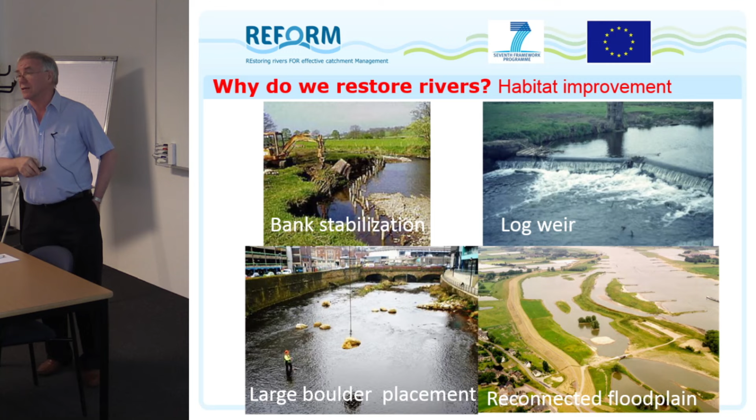We might want to increase habitat diversity through things like small log weirs, where you're creating a pool upstream and some flow conditions or a scouring pool below. Situations like this one in an urban area, this is in Sheffield in the UK, placing rocks because the whole of the channel has been simplified and we want to try and increase the habitat diversity.

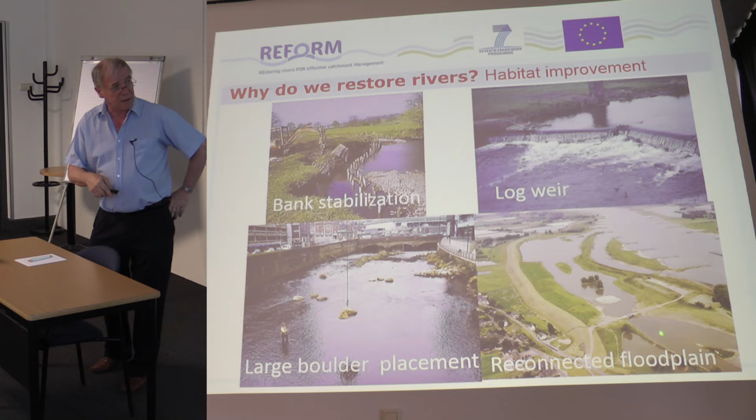And then you go to these very complicated situations such as we've got here, reconnecting the floodplain. This is the river here in the Netherlands, and you've got reconnection of the side water channels and backwater channels while still maintaining the navigation processes. We do a lot of this type of stuff in restoration.

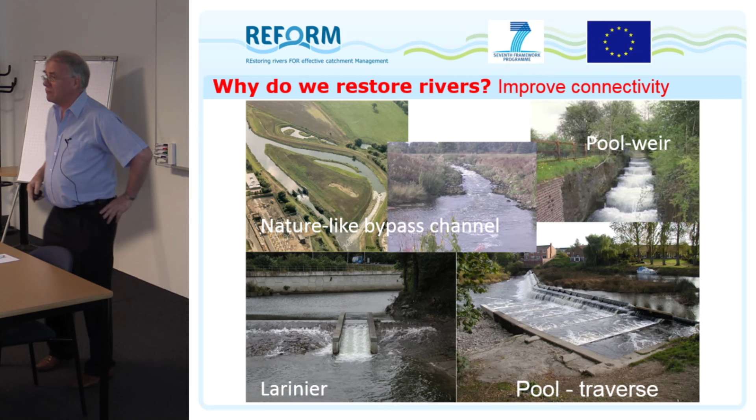In fact, a lot of emphasis has always been on reconnecting the river so that fish can move up and downstream. And so you see huge different types of fish passes, from very simple Larinier systems or pool traverse systems like this, through to very complex ones, nature-like bypass systems, which allow the fish to go up through a stream to bypass an obstacle. These are very good because fish even breed in them, as we found from what we've done in the past.

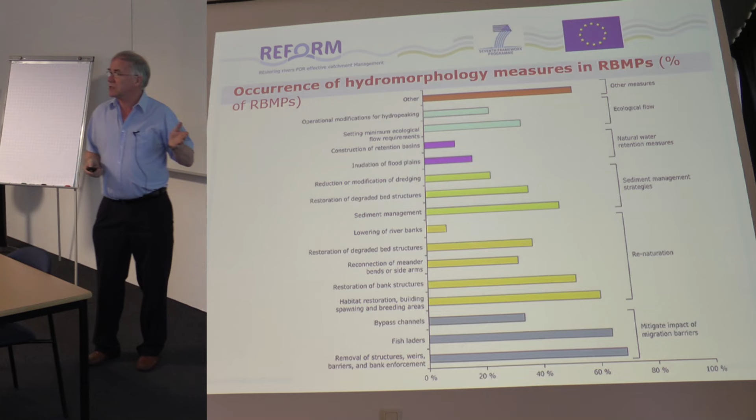So there's an awful lot of activities take place, but which ones do you choose? When you go to a river system that's been degraded in some way, which measure do you choose? Which activity do you choose? Which one's going to be the most successful? And if you have a look at what's taken place globally and also within the European Commission.

We did a review of the various European projects that were taking place and a review of all the LIFE projects that we could find that were dealing with improvements in aquatic biodiversity. And if you have a look at those, in conjunction with about 37,000 North American projects that were looked at by Margaret Palmer, you can actually see that a huge number of them actually didn't have any endpoint. They didn't have any definition of what they were trying to achieve,

which is pretty bizarre considering the investment that goes into restoration projects. You think of the cost of them. So they didn't actually define what they wanted to get out of it. And that's a huge proportion. I'll show you a bit more on this in a second.

Many of the outcomes that we actually looked at in relation to the European projects were related to the Water Framework Directive. And basically the outcome they were defining is to achieve good ecological status, to achieve good ecological potential. But what is that? These are very big areas of change that you're trying to achieve. And quite honestly, if you put some activities in, you may be improving the quality slightly, but you're probably not improving the ecological status. You may be at moderate, but moderate is such a big boundary that you could easily move within it and actually not see any potential change.

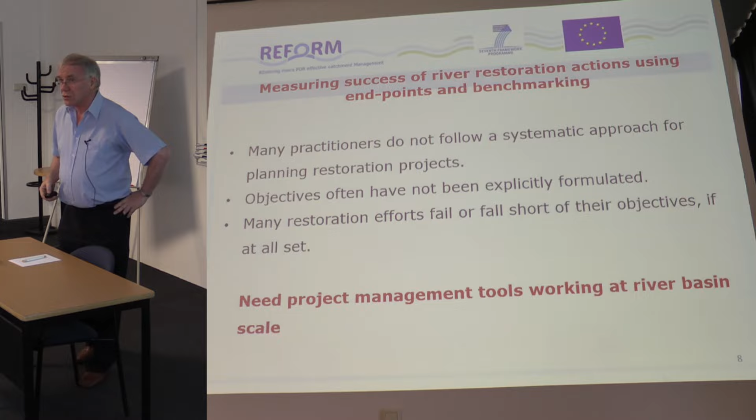The reasons for it are multifold, because really we don't adopt any systematic approach to planning of restoration projects. We tend to go and do them. In many cases, particularly in small scale projects, there tends to be money that's available at the end of a year or becomes available for a small period of time. So you literally go in and do it. You've probably got something you'd like to do and you just literally go and do it as quickly as possible.

So we don't put in the opportunities to measure these activities. We don't often set objectives, mainly because money comes in a fragmented way. So we don't set really solid objectives of what those activities are going to be, or we do them on a small scale and we don't link it up at the catchment level. And that's a problem. We tend to look at individual little projects and we don't have it on a broad-based catchment scale, which is where we need to operate in river restoration.

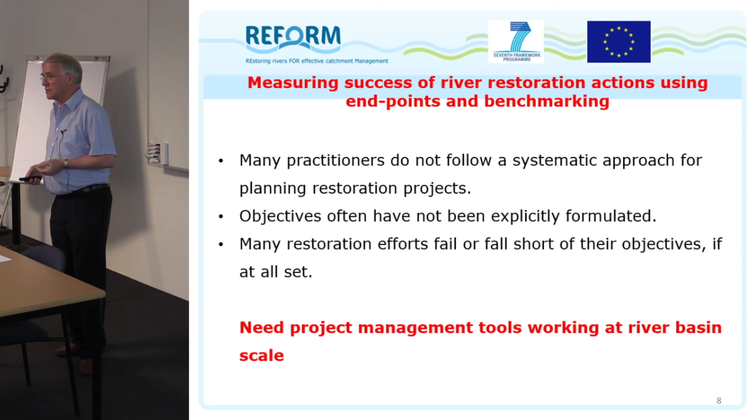Many of them fall short of the objectives, as I've shown you, but the reality is actually the objectives are not set. So we have great difficulty measuring what that success will be. And if we're going to improve our outcomes of restoration measures and all the activities that take place, all the millions of euros that are spent, we're going to have to find a way of actually measuring this. So we certainly need management tools based on the river basin scale to actually look at the success of projects. And what I want to do is show you some of this as we're going on.

The identification takes place, but the formulation doesn't take place. Project implementation always takes place, but rarely do we monitor what's gone on. In this process, at each stage, in the early phases of a project, you should be identifying what the project will be in relation to the needs of your country, your international obligations, such as the Water Framework Directive, or in terms of what that river basin needs to get better. So you're defining objectives at a national level, a local level, and regional or international level. Define what they are, identify what they are and target those things, because that's what you're setting your restoration for. That's what you want to try and achieve. So you want a broad-based approach that can achieve something.

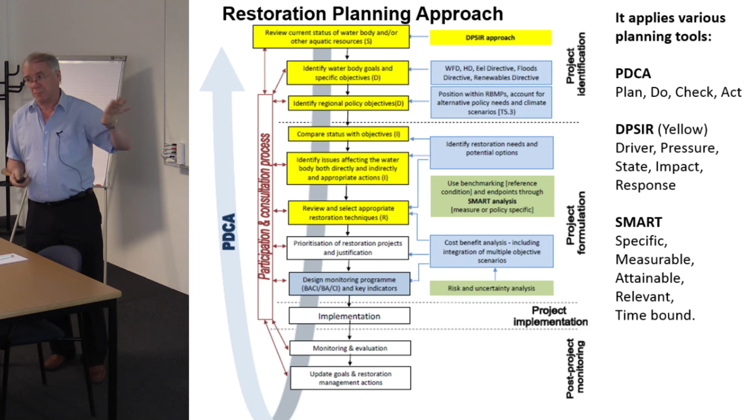The thing about this complex activity is that we've got to capture a few other things within it. And one of the big ones is we've got to capture the risks of activities failing or the uncertainties about activities failing. We actually don't know enough about our project activities and whether the measures will actually achieve anything. What's the risk of you doing something and it failing or actually causing a bigger problem?

A good example is if you put in some current deflectors and they could start to erode the riverbank where you don't want it, and a farmer could lose his field. And I've actually seen it happen where fields have been eroded away. The farmer's not very happy. The material deposits on another farmer who is happy. Or I've seen the footings of a bridge being eroded away and the bridge collapse. So you've got to make sure that there's no risks, or you reduce the risks of your activity before any failure takes place.

You've also got to build this into considering the effectiveness of different river types, river styles. And Angela Gurnell will talk a little later about this, where you've got different rivers that behave differently, they act differently, they function differently, and therefore you have to choose your measures in relation to the different river types that we've actually got. Don't think one type of measure fits all, because it doesn't. It has to be relating to different river styles.

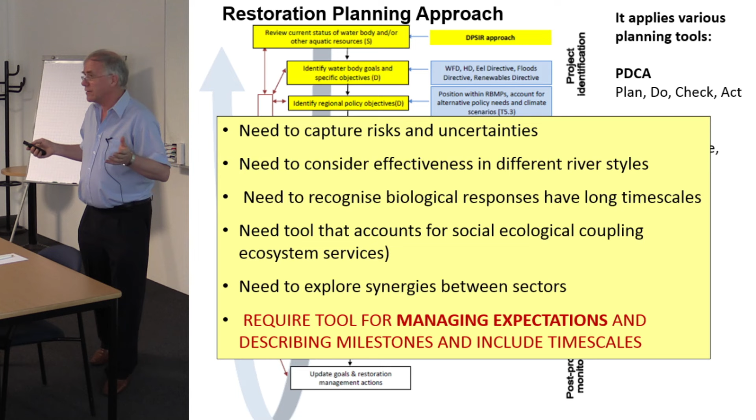So the way forward, how can we go forward? We've actually got to start to put in some project planning tools. We've got to have a complete understanding of our river, its ecosystem, its functioning, and we don't necessarily have that. We need some type of benchmarking, so we need to know what the status, the reference conditions are that we want to try and target, and therefore define key objectives against those targets.

The benchmarking and the setting of objectives should be feasible, practical, measurable, so this is the SMART outcomes. And the questions that we need to ask are, what do we do, why are we doing it, and do we really need it? We should be asking these before we go ahead and project plan. And I've already mentioned that you need the social and economic framework. So you've got to put in the cost-benefit analysis and the social benefits. Do people really need it, or do they need what's going on?

Benchmarking, just to go into it briefly, can be done in a number of ways. We can actually look at reference sites, we can look at natural conditions, and then compare those conditions against your site and see how we can move from your degraded site towards what a reference condition is. The problem here is, how many of these have we got left, certainly in Europe? Not many. We can do predictive modelling, predict what the outcome should be and what we should be targeting, and there are plenty of tools available for that.

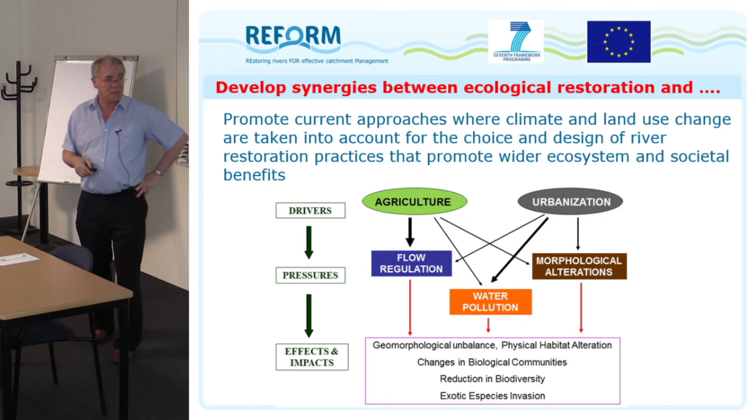It's absolutely fundamental that we don't deal with your restoration measure in isolation. You must look at all the other activities that are taking place. And here's some of the synergies that you've actually got, and they already exist in many parts of the world. And here you've got things like flood protection, making room for the rivers, which is the sort of thing that happens in the Netherlands, where they actually open up the river channel, so they've actually got room both for restoration and for flood protection.

Navigation. Navigation activities occur on many of the large rivers, but can we use them in relation to improving restoration success? Agricultural practices: quite a lot of the problems come from agriculture, so if we can address the agricultural practice, we can probably improve the restoration measure. Hydropower is one of the big issues that takes place, as is urban development. What can you do in urban areas? It's very different to what you can actually do in other places.

By working with these other activities and these other stakeholders, we can actually expand the opportunities for restoration. And actually quite a lot of these can potentially fund the restoration measure, which is useful. So what it allows is wider societal acceptance of restoration activities.

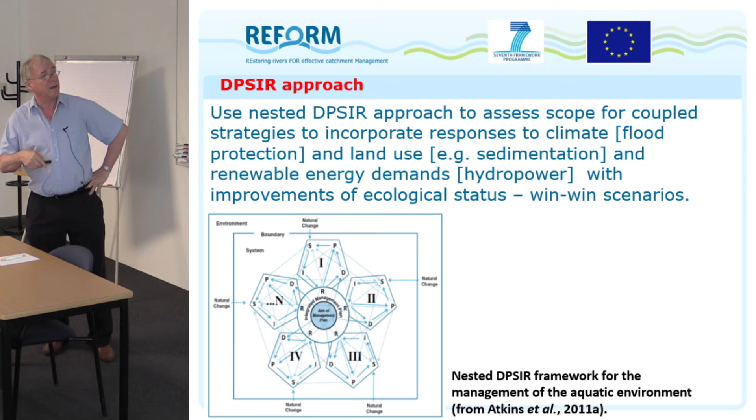Another thing to build into it is an activity called the DPSIR approach. I've mentioned this already. And the thing about DPSIR, this driver, pressure, state, impact, response activity, is that it allows you to integrate the different activities into one. So your restoration is integrated within it. And what you've actually got here is a whole series of stakeholders. So this could be hydropower, this could be flood protection, this one here could be agriculture. And you're looking at what the drivers of each of those components are.

So what is the driver of agriculture? Food production, requirements for water for abstraction. So what's driving it, and what will be the impact of those activities on your restoration activity? Will taking water for abstraction mean that there's not enough water left in the river for restoration? There's a whole series of interactions that you need to look at. And you can't just deal with one stakeholder. There are many on each activity, so you've got to pull them all together.

I'll briefly skip over it, but this is the structure of the DPSIR approach, and I'll quickly skip over that at the moment. Here's an example of the DPSIR in relation to flood protection: the driver is flood protection. We want to stop flooding, a very important societal activity. This relates to the activities that take place. You channelize the river, and then you simplify that river channel.

We've all seen it. You've got these narrow trapezoidal channels which have no habitat diversity. They're no good for biota in general terms. You take out all the vegetation. The impact of that will be loss of habitat for fish, loss of habitat for invertebrates. And so your response is to start to think about reconnecting the floodplain and putting meanders back in rivers, or putting in physical structures that will influence what's going on. So you do these types of approaches for each of the activities.

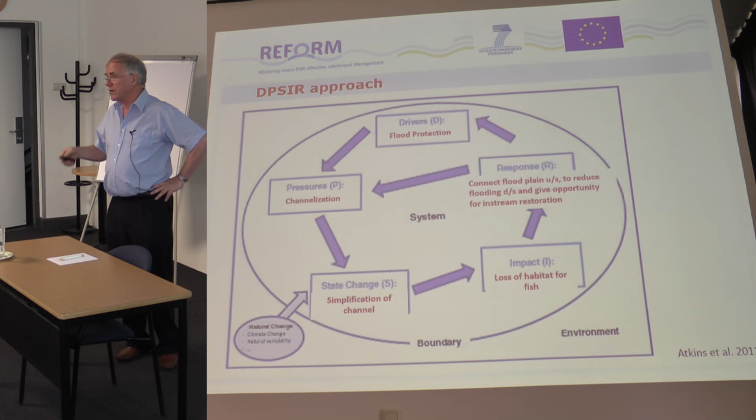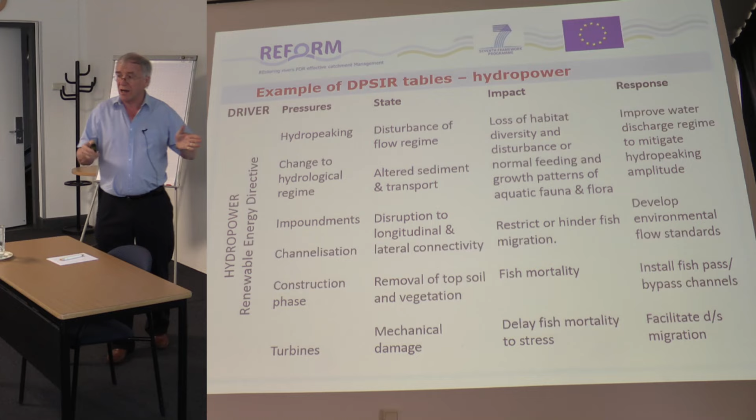And here's one broken down for hydropower, where you're looking at the pressure. Well, the driver is hydropower, and the pressures we get are hydropeaking, because we want power at different times of the year, times of the day. We have change in hydrological regime. We have the impoundment caused by the hydropower scheme. Often you get channelization. At the construction phase, you have problems which are removal of top soil and vegetation. So you've got the activities that are taking place, and you've got the turbine effect. So this could cause mortality in fish.

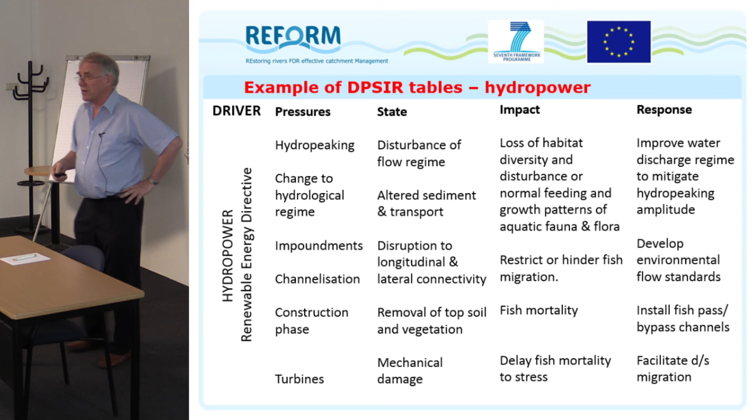Then you look at the states, you look at the impacts that these things will have on the river, and you look at the various responses you can have to it. So you can draw up tables of each of the different activities against the pressures generated by the activity. The key here is that these activities operate differently in different parts of the catchment. So you need to build up these nested DPSIR approaches for different positions in the catchment. They don't fit the whole catchment. So you've got to look at different stages in different parts of the catchment, build the whole picture and build it into a catchment scale approach.

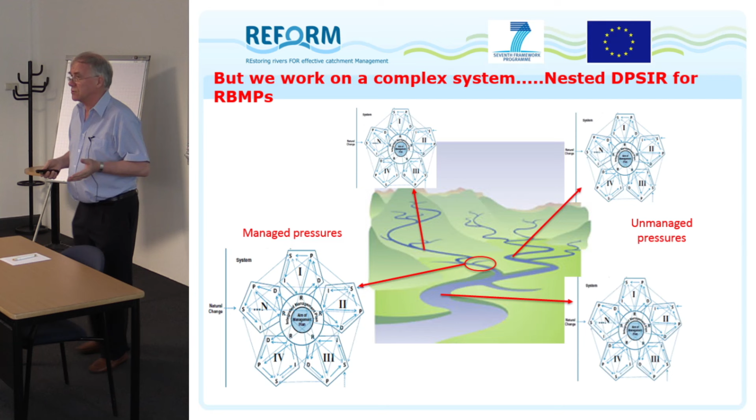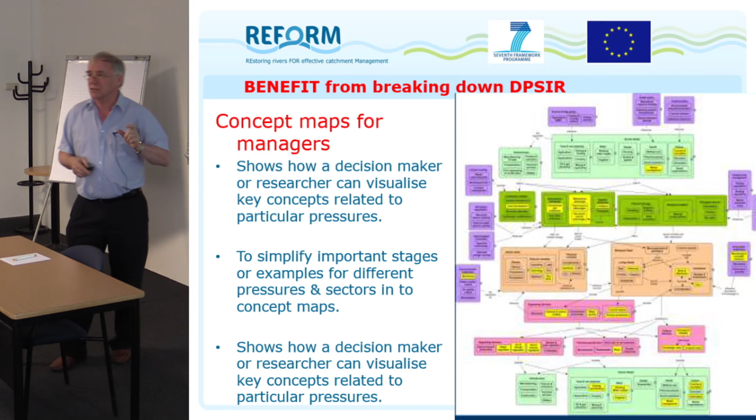And finally, a couple of other tools that perhaps we ought to be looking at for this cross-sectoral integration are multi-criteria decision trees. What are the relationships between these different activities? We've done it through DPSIR, but that's quite complex, and sometimes when you look at the outcomes, such as that concept map I've shown you, it's very complex. So can we simplify it?